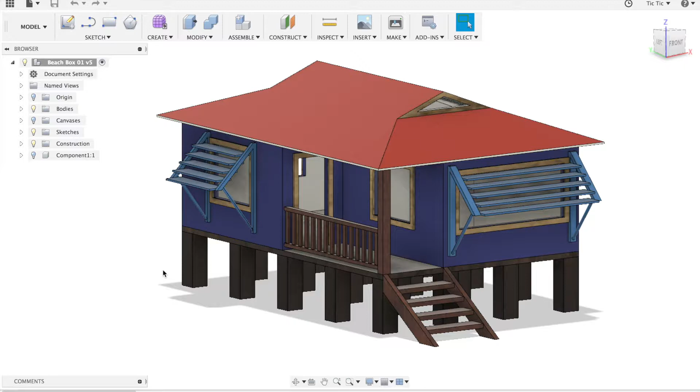I could change some of the appearance here, but I'm going to pretty much maintain the navy blue with the red roof, and the wooden trims as is appearing in that particular case. I'll probably change the louvers a bit at a stage, and I might change the internal wall colors as well. But basically I've got this going here, and I'm going to take it now into render mode.

So if I go into render, you can see here that it changes to a view. I've changed my background, I've played around with the setups and appearances, so you can do that. The scene settings is where I change my color over in the background there. I just changed it to look a little bit more like sand.

I've got a render that I've already done, and this system can render on your computer or it can render in the cloud. Rendering in the cloud can take a while, which means that you often start the render and then come back later. My first render, by the way, was basically a 360 degree render, in terms of the thing rotates 360 degrees. So if I double click on this, it will open up eventually.

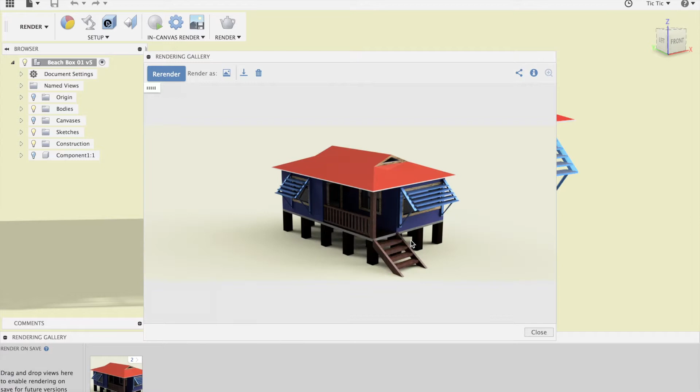Depending on how fast your internet connection is, because this is actually on the cloud, you'll see it there, and it's just going to rotate on its spot from around there. I can download that by pressing that download button.

To create that, I pressed this button here, which is the teapot button, the render button, and I rendered it - it's the only option under there. At the moment, I'm just rendering a single picture, which takes 1 credit. Doing the revolution is a second step that we've got to take.

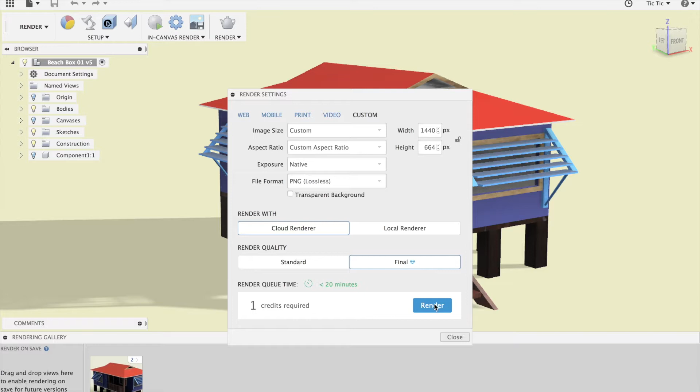So if I click on that now, hit render, that's going to send it off to the cloud. It reckons it's going to take approximately 20 minutes. There it is there. I can now close Fusion 360, and when I come back, it'll be there and done.

Last time I did this particular view, it took about 1,000 seconds. Once that's finished, you can press the save or capture image button and save that there, but you don't have the option of doing the rotational video. I'm going to stop that because it's just going to slow my computer down. Those are the 2 ways you can achieve a render.

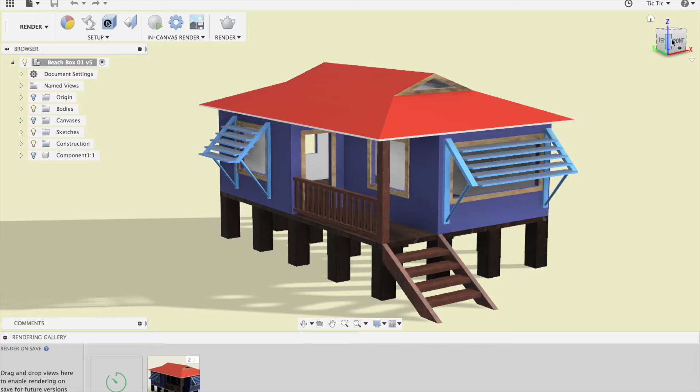Once you've got a render, you can then print that out. If it's in video format, that's not really helpful for what you want because you want a printout of your particular view. Make sure you've changed it so that it's going to give you the best possible view of your render. If you want that particular view, for example, you can start rendering that.

That'll actually give you a different view. Notice how dark it is inside - you don't really need to worry too much about that. But basically, that's what it's going to be like out in the real world. That's how dark it's going to be inside, with the sunlight coming from that particular direction.